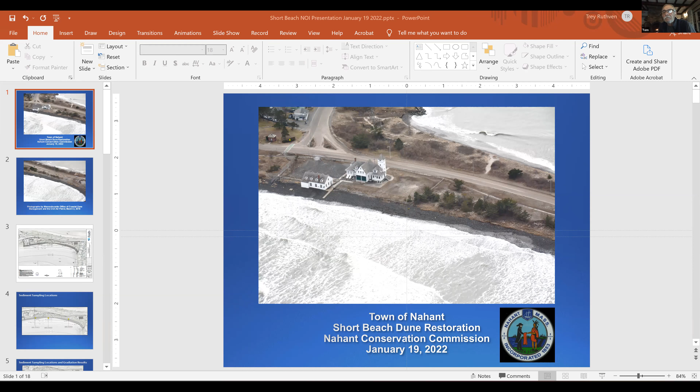Here you can actually see, can you see my mouse when I move it also? No, I can't. I don't know if anyone else can, but I can't. This might be able to do it. Can you see the red dot now? Yes. Oh, yes. Okay, perfect.

So obviously you can see the playground here. Here's Nahant Road. Here's the upper cobble dune system. And you can see the washover dune material kind of moving landward.

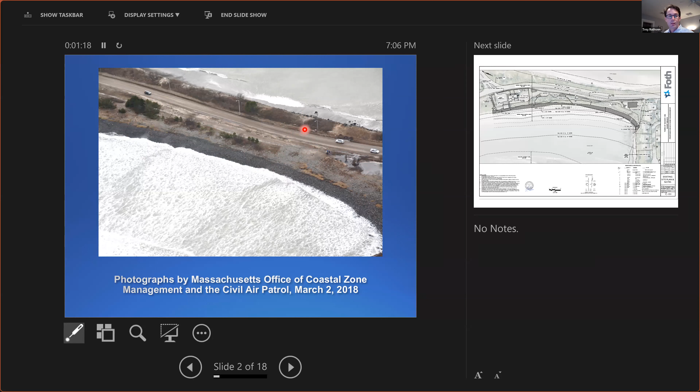This is the existing condition plan. What I wanted to highlight here is the gray area here is the existing cobble face. Right here is the life-saving station, playground right here, Little Nahant. You can see here mean high water running along the solid line, annual high tide, the next solid line up.

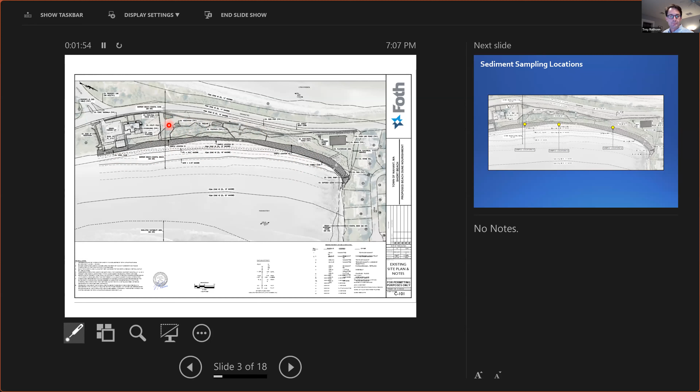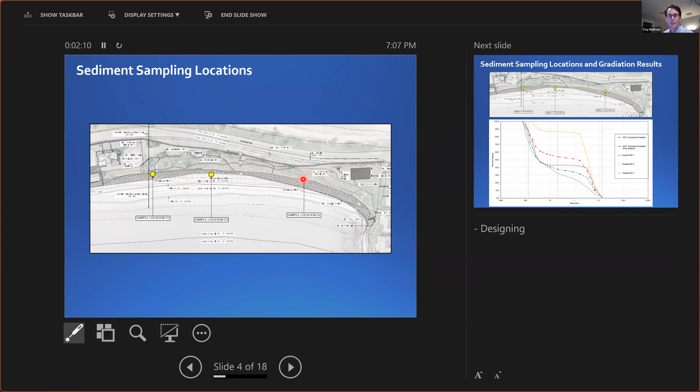What we're going to talk about in a bit is some of the woody vegetation that's in here, and you'll see that later in the proposed plan and how we're avoiding impacts to that. As part of the dune nourishment and developing it, we took sediment samples from along the dune system. There were 3 samples, 1, 3, and 2. Those samples were sent to the lab, Briggs Engineering and Testing, and a grain size analysis was conducted on them.

The main points that I wanted to point out here is you can see the 3 solid lines. Each of the solid lines is a single sample result. The 2 dashed lines are composite samples. The yellow sample here, which was taken from the beach, you can see here basically at just below 0.1 millimeters to about 4 millimeters is sand. From about 4 millimeters to 3.4 inches is gravel, and beyond that is cobble. So for the beach sample, you can see we're roughly 85% sand with some gravel and cobble mixed in.

For the 2 samples, the blue and the purple, which were taken from the dune system, you can see that the composition of sand, gravel, and cobble obviously is drastically different. For each of these samples, there's about 25 to 42% sand. Moving over here to about 88% gravel, which would mean we'd have about 45% in there with cobble after that. What we were looking to do with the dune nourishment is to follow this green composite line as our representative mix. So that'd be roughly 35% sand, 45% gravel, and 20% cobble.

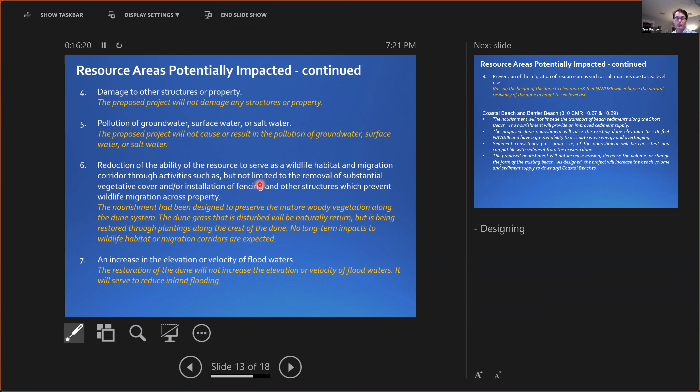And with the dune nourishment, preserving the trees, and revegetating afterwards, we will maintain the wildlife habitat that exists and the migration corridors. There will be a temporary impact as that material goes in before the vegetation is replanted, but that'll all happen in quick succession. So any impacts would be very minimal and very short in duration. And restoring the dune is not going to increase the elevation or velocity of floodwaters. And talking to CZM and DEP, they'd all like the dunes to be able to continue to migrate landward as they see fit. It's a little different and a little difficult here in Nahant, with Nahant Road immediately behind the dune. So in a sense, we really don't want the dune to migrate, but by nourishing and adding volume, we're not preventing any of the natural processes that cause the dune to migrate from occurring.

When we look at 310 CMR relative to coastal beaches and barrier beaches, by adding nourishment to the dune system, we're not impeding transport of beach sediments. Raising the dune elevation will increase the ability to dissipate wave energy and overtopping. We're going to go to great lengths to ensure the sediment is consistent and dune compatible in this category. So we'll be placing material that is basically native to what's out there, just from a different source. And proposed nourishments are not going to increase erosion or decrease the volume of the beach or dune.

So when we go down to 310 CMR 10.28 relative to the dune, it's the same impacts that we would expect before. We're increasing the volume of the dune. We're not affecting the ability to dissipate wave energy or remove sand from the dunes. We'll have a minor disturbance to the vegetation cover, but that will be replaced once this dune is revegetated. And we have gone to the trouble of preserving all the woody vegetation for all the positive impacts that will have on stabilizing the dune and stabilizing that area for habitat and wildlife.

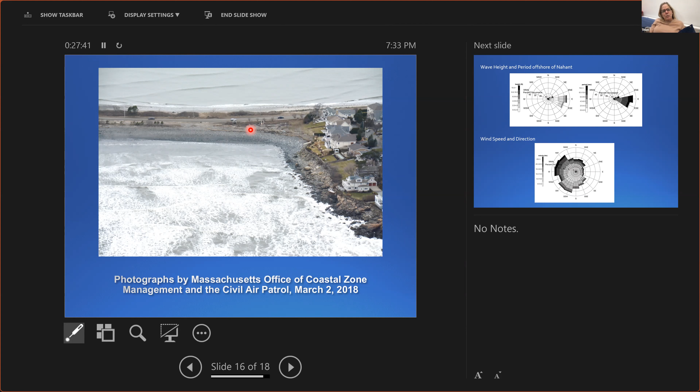So I've been in Little Nahant for a long time, and that path was actually created by people just blazing their own trail to get on the beach. And I think it's great what you're doing.

I may be way too late to the party to bring this up, but the concern that I see here is it's going to bring people out in the middle of where the biggest deposit of algae is. And the reason that people cut through, I speak from personal experience, I hate to say it, but being a kid in Little Nahant, we would try to avoid the algae and cut through, find our way through the Rosa rugosa. And I just fear that that problem is going to come up again.

So I don't know that there's anything that can be done about it, but the one thing we could do, and I think it'd be easy to do after the hearing during construction, especially in consultation with Kristen and also DPW, is that if there's a large feeling that, and I've seen it out here where it's fairly heavy, we could close up this access point here, migrate it, still in the park down here, and do kind of a similar shape.

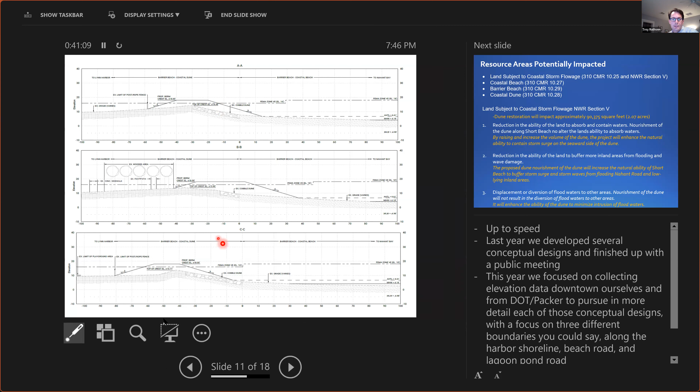Sure. Let's see, cross-section. So this is CC, so this would be in the area of where the playground is. Let me see. So you can see actually the crest width is fairly wide. It's roughly 20 feet or just shy of 20 feet, 15 feet in width before coming down. So we actually do get a fair bit of dune volume in there. And the one thing to keep in mind with this dune is it's dynamic.

And part of the benefit of having a mixed sediment dune, especially in this location, is once we restore the volume, especially with beach compatible or dune compatible material with the sand, gravel, and cobble, that dune face is going to be better able to withstand wave energy coming in and preventing that damage.

Looking at Short Beach as a whole, obviously, the town has a lot of work ahead of it to not only deal with Little Nahant to Life Saving Station, but then going further eastward all the way down to Nahant. So at the moment, with the location of the playground and the area it represents, it obviously provides us a fairly good staging point for constructing this dune and increasing the resiliency.

If I thought we needed that area, I would have pushed much harder to try to convert it over. But I think at the moment, with the resources we have available, this is the best solution, and that part is not really representing any kind of impediment to increasing resiliency.

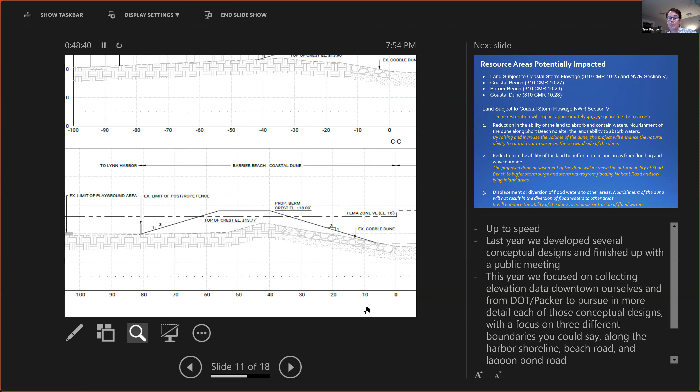Actually, attached to the notice of intent that came in are all the lab testing results, which do rate it all by sieve. Okay. And sample 3, which I believe is in the middle, was below mean high water. And so, I mean, down on the beach, down where it's underwater most of the time, on the beach.

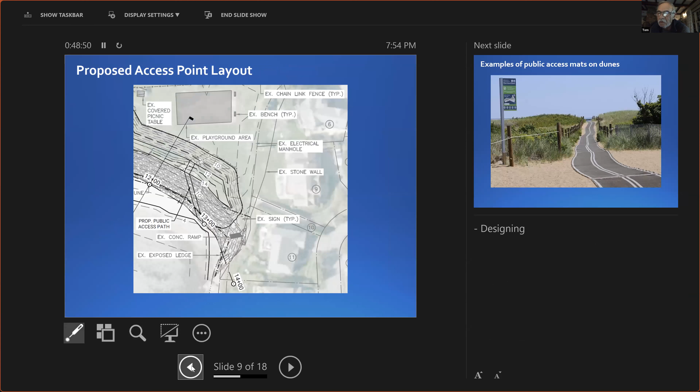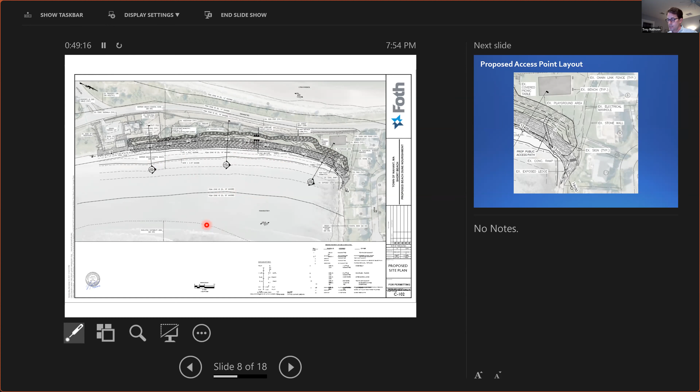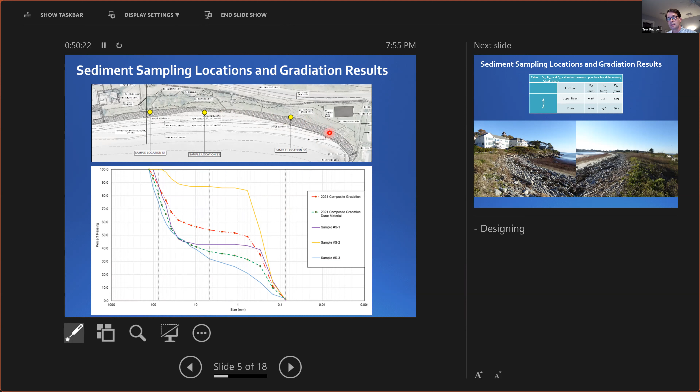Why is it altered? We're not going below mean high tide. No, but the new nourishment will wash down there. Well, with the grain sizes that we're using, which is predominantly going to be coarser sand, gravel and cobble, you're going to see a very similar formation to what's existing. It'll be coarser though. It won't be coarser, it'll be very similar. And what you can find, even if you go back here in the vegetation and dig test holes, is that you see very similar composition.

Obviously here, all the rock is just on the face, but if you dig below the face of that, you get consistent samples of a mix of sand, gravel, and cobble in here, and it's also true in the backside. And so as we nourish and come up and over and down, we're going to maintain a lot of this material in this location. During storm events, it's going to be pushing it landward. We're going to get very little, especially due to grain size, pulling that back seaward. So I don't expect to see any of this coarser material down at the mean tide line or even much below mean high water. It's all going to stay up here in the dune system where it's needed.

So it won't look like Revere Beach. No, it won't. The one thing is, Revere or Winthrop, they're obviously directly east facing, and so they get worked a lot harder than Short Beach does. They're also manipulated a lot, where the beach face itself is manipulated. Obviously, Winthrop, you're likely aware of them mining sand from behind the Five Sisters and moving it up and down, which has actually done a great deal for reducing storm damage in the neighborhoods behind.

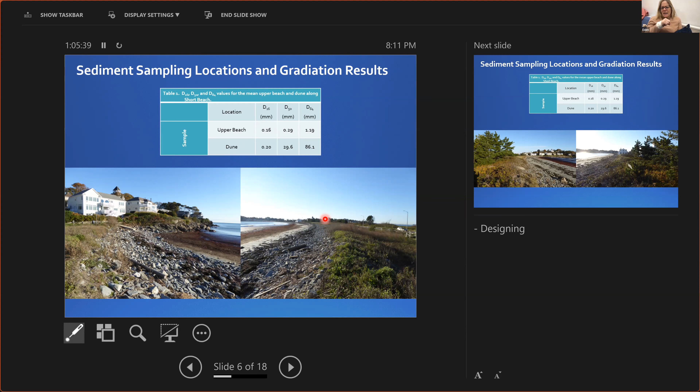Okay. I have one last question, which may or may not pertain to you. It's just about the fencing that you showed on the path to Plum Island. Is that part of your project, or is that going to be done by someone else? Like the fencing that is further down the beach with the rope. That's what we have now. So I think it'd be something similar. Well, I was just curious, if one concern is people walking through while the seedlings of the beach grass are filling in, could we put something more substantial in there, at least temporarily, so they have a chance to grow?

Sure. So this is a slight difference. These are round poles with cord running through, and Nahant has 4x4 posts, which are square, with the same treatment. The one thing I can say through numerous projects is that once you provide a visual corridor for people, they really like to stay in them. People don't like to veer out. So if we can prevent paths from being made, people generally don't like going out in this vegetation. There's some other tricks we can use. If we start placing signs talking about the dangers of ticks and things like that, all very true facts, it helps remind people of why we don't want them in the dunes, and they're amazing at how they can help shape people's behavior.

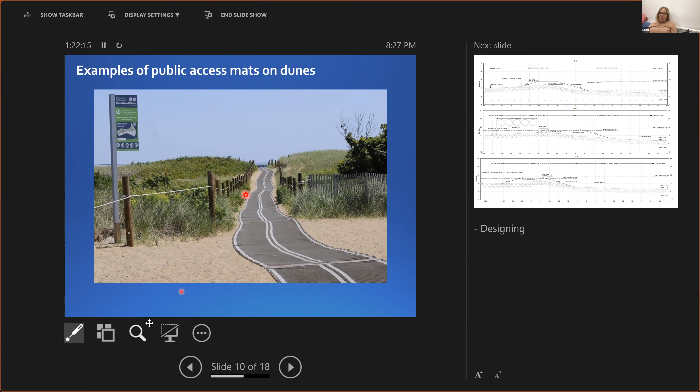Okay. So do I hear a motion to issue an order of conditions with the aforementioned special conditions? So moved. I'll second. Okay. All in favor? Aye. Aye. Aye. Okay. Passes unanimously.